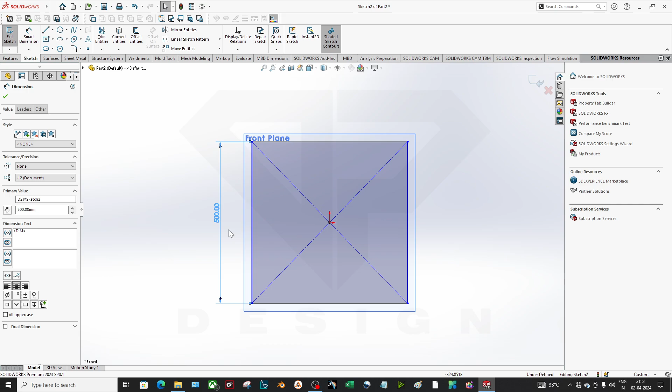As you can see, I've given the dimension for particular lines. I'm going to delete it and start from scratch. If you have created the sketch and want to give dimensions, bring the cursor to smart dimension, select 2 points, click OK, and you will have the dimensions. Then you can input your dimension value, whatever you want to give.

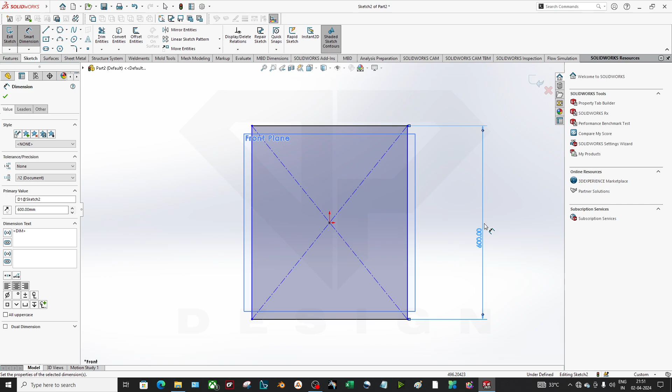Like, that's a square, I'm putting 600. Now either you can give dimension between points or to the edge.

Now if I want to give the dimension linearly, like this dimension, a vertical dimension, you can just select 2 points and drag it to this side. So it will be a vertical distance.

If you want to give the distance to a particular edge, you just give the cursor. It's all dependent on your cursor movement, where your cursor is, and according to that it will give the dimensions. So make sure you are giving the right dimension according to your need.

Like I want to give 300, then you can also input this as 400. Now here you can see I have the blue line and here the black line.

What does it mean? It means this sketch is underdefined and this sketch is fully defined. Whatever black color you are watching, that is a fully defined sketch. Fully defined sketch means it never changes, even after you change something else. So you should create a fully defined sketch for the perfect 3D model.

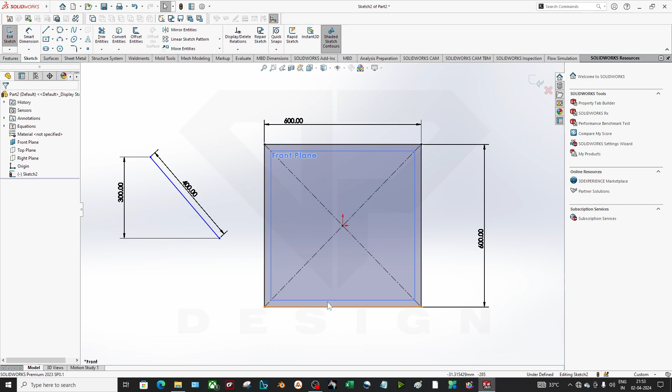So if I want to fully define it, why is it not fully defined? Because the coordinate system is not there. This dimension I have given, but it is not fixed from any coordinate system. So what can I do? I can just fix it over here and it will get fixed because my vertical dimension is locked.

My point is locked now. I cannot move this around. So you have to give the fully defined sketch.

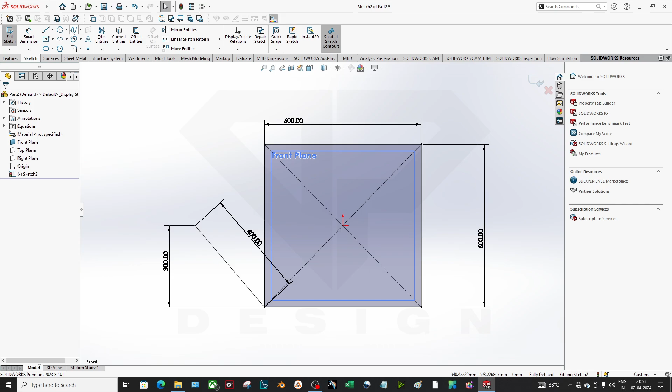Now if you want to give the diameter to the circle, you can just click the diameter and you will have this one.

If you want to give the dimension between the circle center and this line, you select the circle and give the dimension. If you want to give the dimension from this circle end and this one, you have to select shift and select, and then you will have the dimensions.

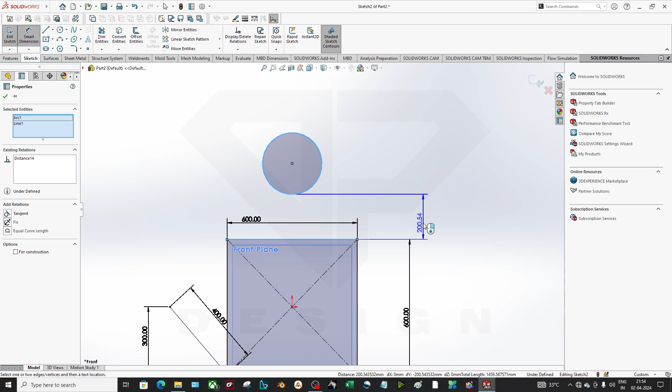So these are some basic tricks you need to know. These are very good practice while you are doing them. If you select upper side, it will select from upper side. So you can give the dimensions that way.

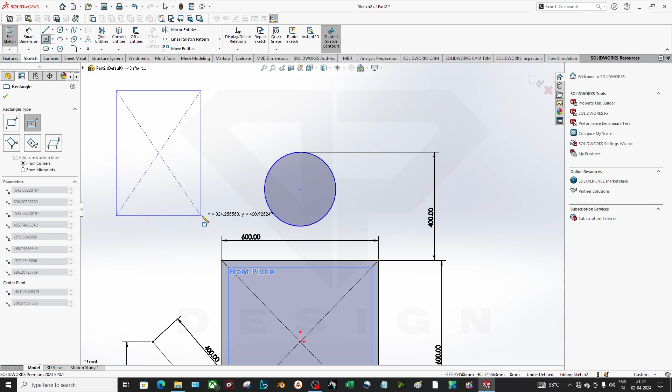And to give the radius, like if I have created this rectangle, and now I want to give a 3 point arc, what you can do is give the radius, like I want to give 150. That's how you can give the dimension.

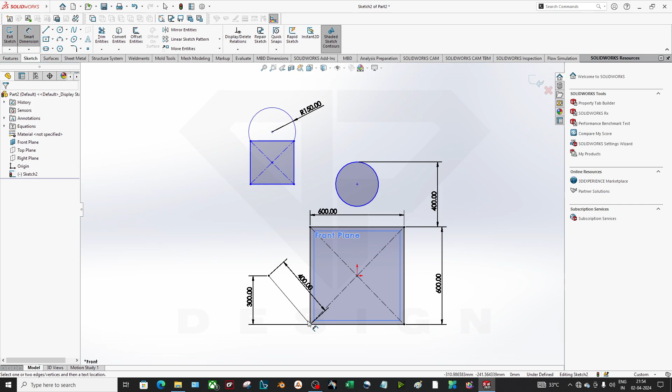So make sure you are giving the dimension right. Now if you want to give the angle, how will you do it? Let's say I'm creating this. You have to select 2 lines and it will give the angle. You can just click on it, 45, and I will place it over here.

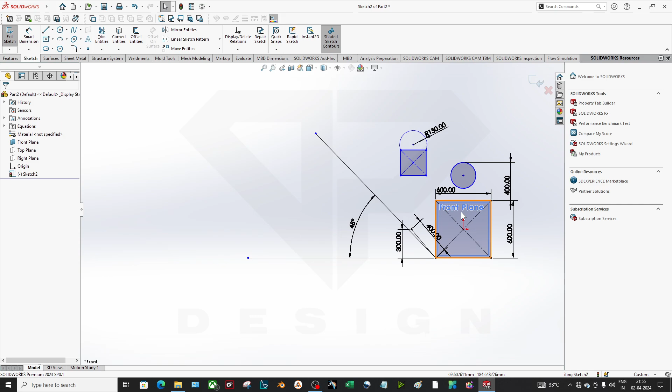As you can see, my fully defined sketch is there. Now if I delete this underdefined sketch, what will it show? It is still underdefined. Why? Let me show you. It is still underdefined because my line has not been fixed.

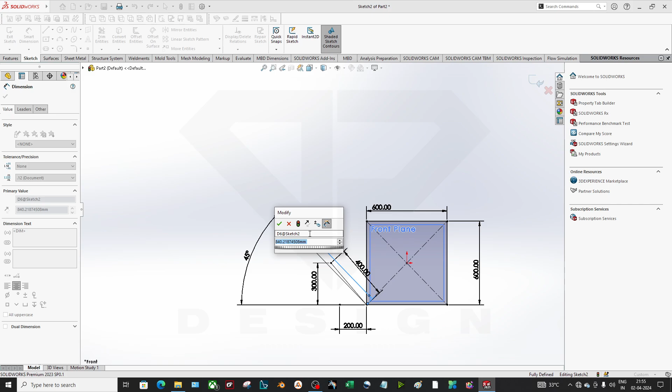So you can just give the dimensions to this line. Let's say I'm giving 200, also giving 200. Now you can see it's a fully defined sketch. So this type of sketch you have to practice.

You can give many types of dimensions, but make sure you are using the smart dimension as a beginner, because these are some advanced types of dimension you can give. We will use it later whenever the requirement comes.